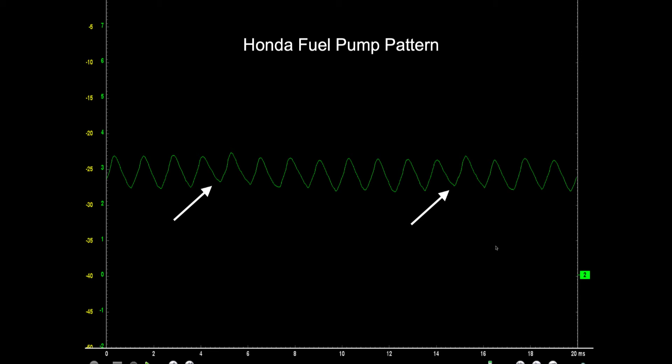They give us one revolution, so right from here to here is a revolution. Cursor 1, put your cursor down. We measure about 9.9 milliseconds across, that's almost 10 milliseconds. Now if I divide that by 1,000, because a second is 1,000, I get 100. Then 100 times 60 seconds, you multiply that, I get 6,000 RPMs. So this pump is actually moving about 6,000 RPMs.

Now, as far as I know, there is no good specification or book to indicate what each fuel pump is supposed to be. So you've got to take known good patterns.

So basically it took 10 milliseconds, right? 1 second is 1,000. Divide that into 10, you get 100, gives you 100 RPMs per second. And 60 seconds in a minute, so multiply that, that's how we got to 6,000. I know it's kind of complicated, but keep practicing, you get used to it.

Now look at this fuel pump. This is definitely bad, it's all over the place. This is a bad fuel pump.

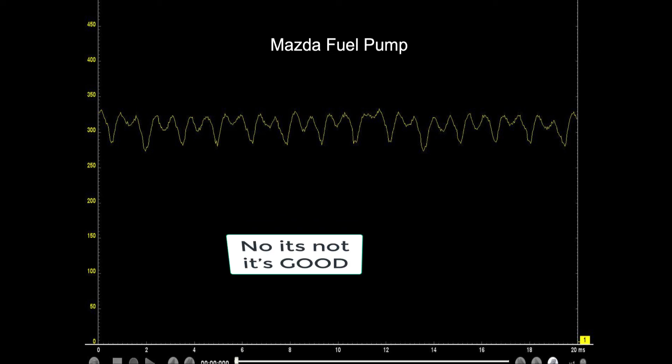Oh no, wait, let me think about it. It's uniform, it looks bad. I thought it was bad for a second. It looks bad, but it's not. This is uniform, this is just a Mazda pump. Alright, you'll think it's bad, but it's not. That's normal, because everything is uniform. But at first glance, I thought it was bad.

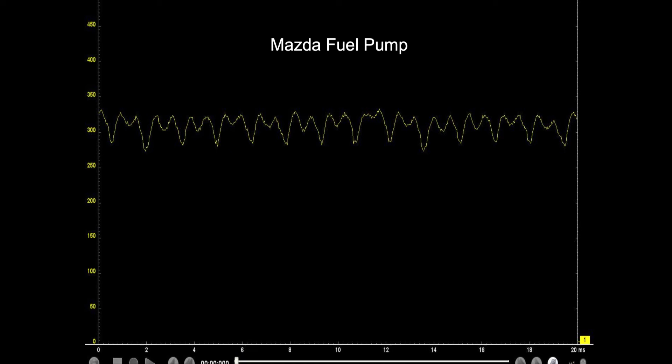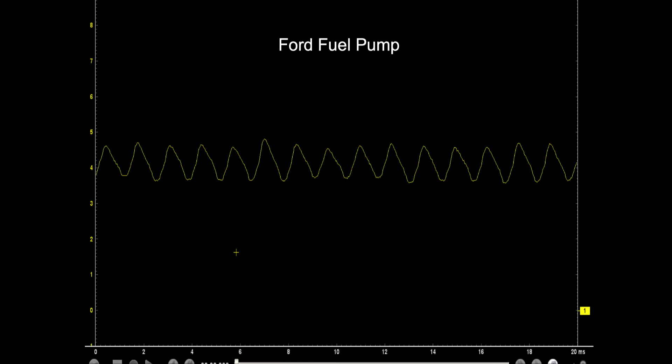Here's a Dodge fuel pump. And here's a Chrysler. You see something real quick? I read this wrong, it's not 2, it's about... well, this is good. This one is about 4. I said 2 last time, read it too fast. That's about 4 amps.

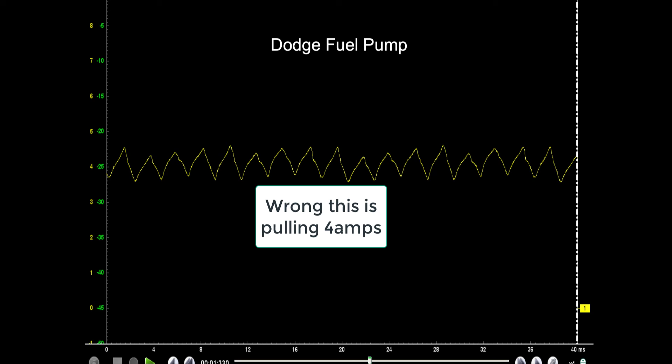That's good, this is good, that's a good reading. Here's a Dodge. This is a normal reading also. Here's a Chrysler fuel pump.

Now this one, look, it may be working a little too hard. This one probably has a plugged fuel filter. You can see my pattern is uniform, so you can see the brush is okay, but the amperage is kind of high.

If I remember correctly, the book says 1.5 amps. It's pulling about, I would say this is closer to 2, a little over. So this pump is working a little hard. I'm going to take a reading here and see if it looks just like it.

1, 2, 3, 4, 5. Let's see. If I guess, it's gonna be one of these two. There you go, I thought it would be the other one, but now I put my cursors into play.

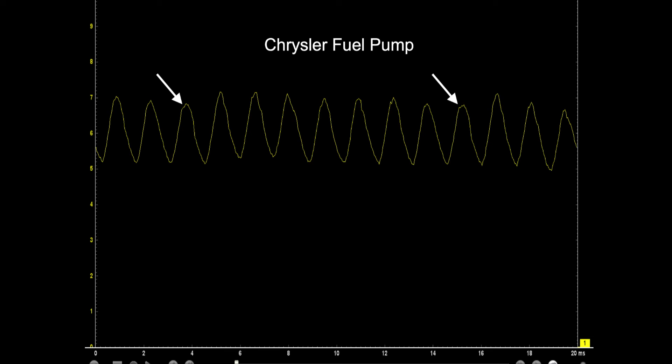I'm getting 11.5 milliseconds here. It comes out to about 5,200 RPMs. In the book it says this pump is supposed to be about 6,000 RPMs.

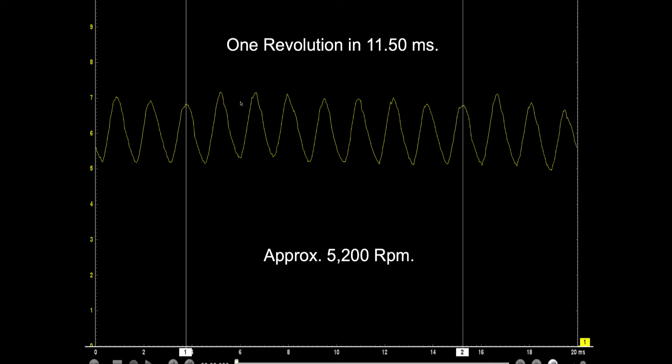Alright, so it's working slower than it's supposed to be. But again, you don't see any burnt brushes, all the humps are about the same. Like I said earlier, if I had a bad one, this would be way high or it'd be way non-uniform. So this could be due to a plugged fuel filter causing the pump to work really hard and slowing down the RPM.

Let's find another one. Let's find a bad one.

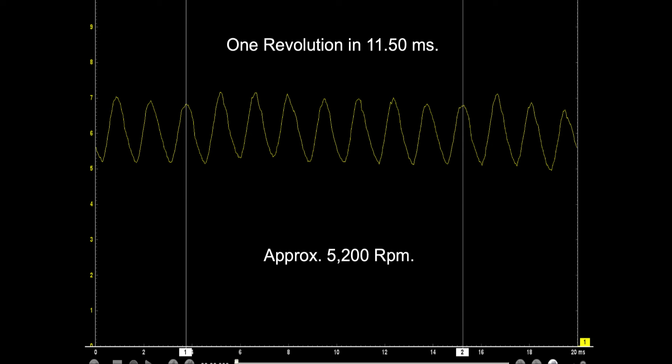Now look at this one, this is a bad one. There ain't no way in the world this is uniform. It's just a bad Mazda fuel pump. Either the brushes are worn out, like the brush is probably worn out on this one. You can see there's no uniformity to this at all.

Now let's look at it, it's going up and down. Look at this, there's just no uniformity to this at all.

So this one is gonna have a future problem. Even though this car is running, eventually this pump is gonna go out, this is gonna have a future problem. It probably got bad brushes inside of it, causing it to wander like this. Alright, that's it for this one.